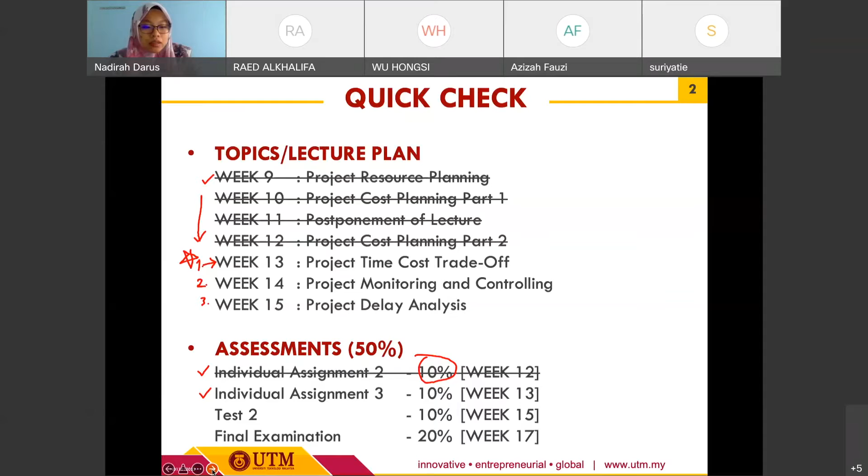All right, so that's all for the quick check. Then we need to proceed to today's topic of project crashing, or project time cost trade-off.

Before that, I think we just do a short recall for our project cost planning topic, which is on week 10 and also week 12, before we proceed to today's subtopic. All right, just a quick recall. Last week we have covered on project cost planning.

The main items or the main topic for this project cost planning is that you need to understand, if we refer back to project cost planning part 1 and part 2, the type of cost, the breakdown of the cost, so that it is easier for you to do the calculation and to analyze the question. So if we refer back to project cost planning part 2, you need to be able to analyze the question requirements, especially in terms of the value or cost of work or cost of the project.

This one I have mentioned quite several times, so I think all of you already remember this. And then the other thing quite important, based on the question requirement, you need to know which amount needs to be deducted and which amount needs to be added to the calculation. This one is more focused on the calculation part.

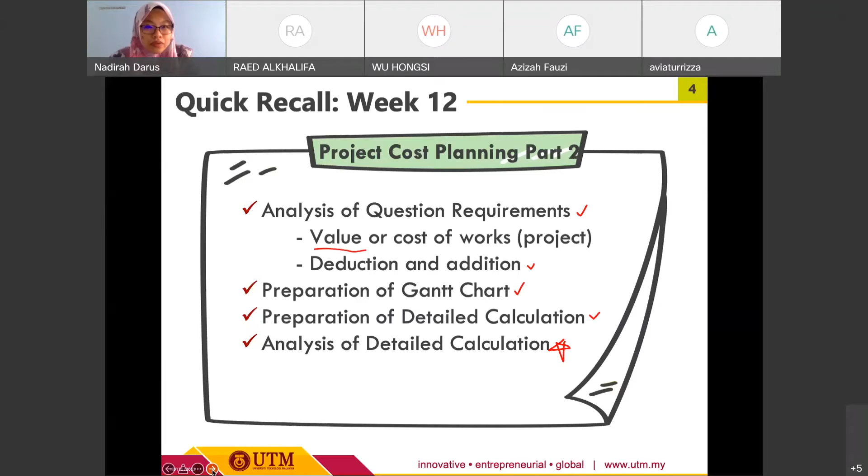So that once you have analyzed the question, you need to proceed with the required steps, starting from the preparation of the Gantt chart, and then you will be able to prepare the detailed calculation and answer the question by analyzing the calculation. So I think all of you can do the calculation and are able to complete the previous assignment. So that's all for the recall, or just a quick review, for our previous topic.

So now I will continue to this topic, which is on project crashing, or project time cost trade-off.

Okay, let's start with the introduction or overview for project crashing. I just refer to it as project crashing since it is easier for us to call it that instead of project time cost trade-off, because that name is quite longer, right?

For the introduction, this is just the definition of project crashing or project time cost trade-off. There are several terms we can use to refer to project crashing: time cost trade-off, project compression, since crashing and compression are quite similar in how we crash and compress activities. I will explain later what this topic is all about. Other terms include project expediting and shortening.

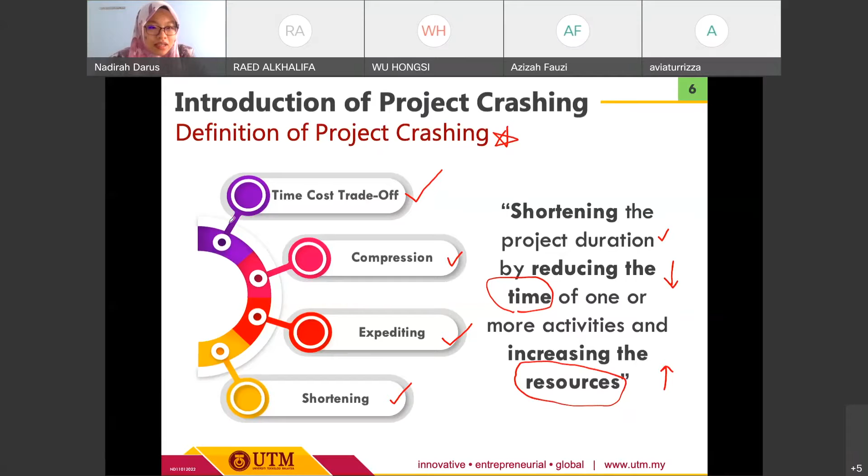This is another subtopic. This one relates to the previous one, project cost planning. However, I would like to highlight again the total cost, since this relates to this topic too, so just a quick recall or revision.

CV, or contract value, or project value, is equal to total cost plus profit. I think by now all of you are aware of this simple formula, so hopefully you can remember it and apply it in your calculations. Again, the breakdown for the total cost is a combination of almost 90% direct cost plus 10% indirect cost. These two components are the main components which contribute to the total cost.

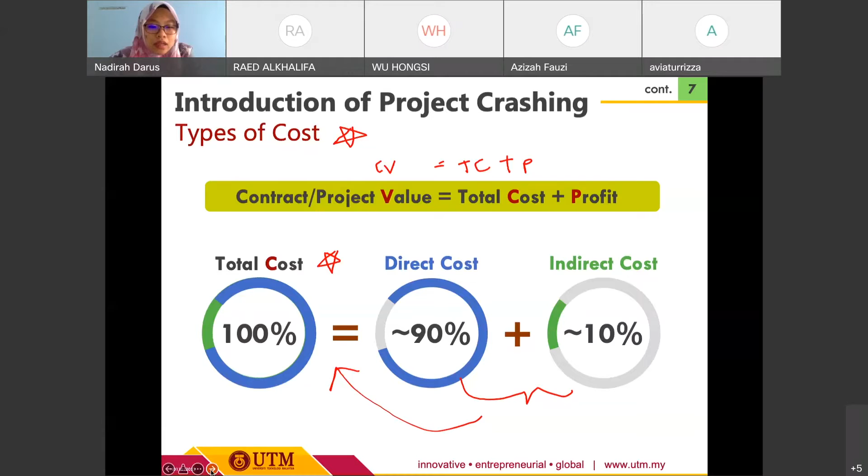So this is just a simple and straightforward relation formula. The next subcomponent for today's class is the relationship of time and cost. I mentioned earlier that there is a relationship between time and cost, which is why the topic is called project time cost trade-off. The title itself already mentions the time cost trade-off. These two terms, time and cost, are interrelated for the purpose of this topic, and we are going to look at this in detail.

This is a conceptual graph to represent the relationship of time and cost in relation to project crashing. This is another view of the time and cost relationship, because previously we also looked at several types of plotting for direct and indirect cost. However, this one is quite different, another scope for the time and cost relationship. What we have here is, as usual, the main components of this relationship: cost and time.

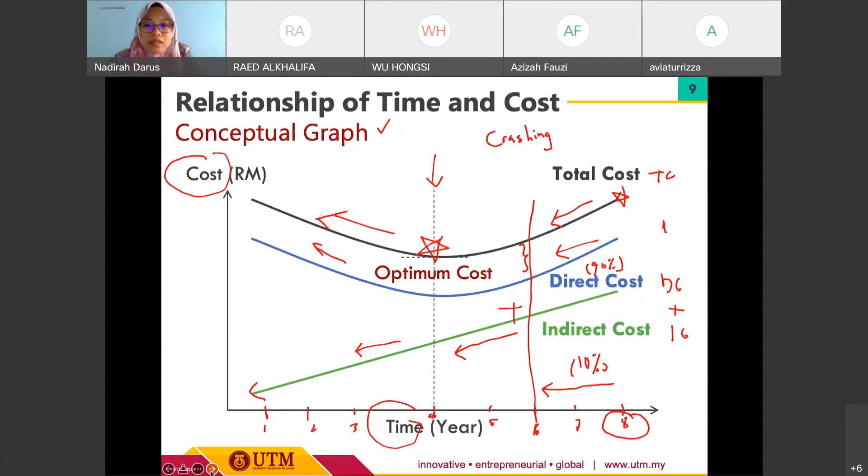This is the description for the previous conceptual graph. Here we have two situations. The first one is quite a normal condition, whether we want to increase or decrease.

For example, this one, we try to increase the project duration or time. So in normal condition, as we know, once we increase the time, for sure direct cost, indirect cost, and automatically the total cost will be increased. That's what we call normal condition for the time and cost relation.

In case of project crashing, because we try to shorten, we try to compress the time, the duration to complete the project, as I already mentioned just now, in case we decrease the time, we compress the time, there is still a tendency that direct cost will be increased.

Normally, if we try to decrease to an extreme level, if we try to compress the activities, try to shorten the duration to an extreme level, that requires the contractor to fully utilize the resources. For example, they need extra plant and machinery, they need more manpower to complete or construct the work. That's why they for sure have this higher direct cost.

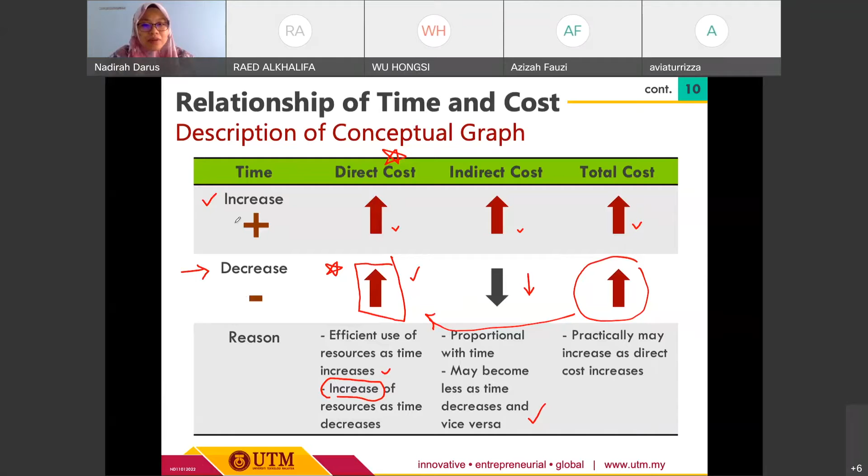So up until now, is everything clear regarding the relationship of time and cost? Is everything okay? All right, that's all for the relationship of time and cost, so we will continue to the next one.

The next one is related to reasons, or purpose, of project crashing. Meaning why we need to do the project crashing, the project shortening or compression. There are several reasons we need to know in order to relate to this topic.

The first one falls under the category of bonus or advantages, because in certain situations the client requests the project to be completed ahead of the actual scheduled time. This is based on client request, for example, we have a residential project.

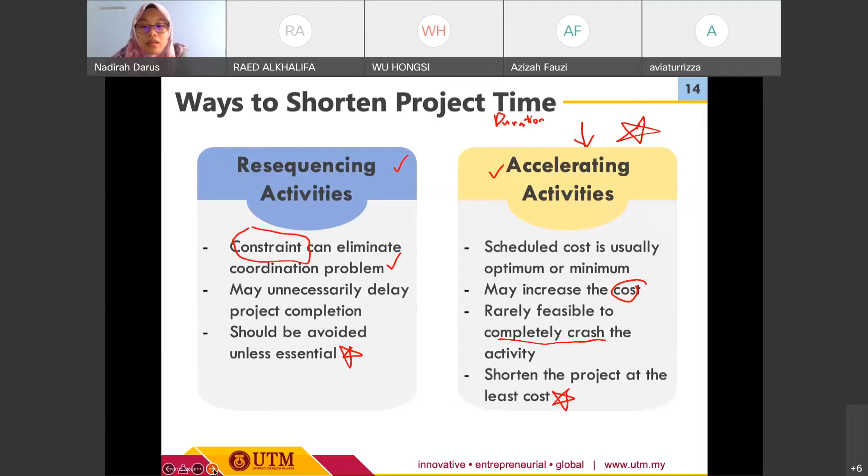Because we try to balance these factors, time and cost, at the end the contractor will not bear damages or any loss for the project.

So how do we want to crash the activities? There are several options for conducting the crashing. The first one is related to manpower or labor, which is the first M of the 5M resources I shared earlier. In order for the contractor or planner to crash the activities, they require extra manpower for each activity, and most of the time they need multiple working shifts. They may need extra working shifts, hours, or days related to labor, the manpower.

The other option is related to plant and machinery. In order for us to decide on project crashing, we need larger plant and machinery with higher output or productivity. So once we compress the time, for example with tower cranes or mobile cranes, instead of using one or two for the project, we may need double the quantity, or more, for higher output for each related activity. That's why there will be additional equipment or plant and machinery needed for certain tasks or activities.

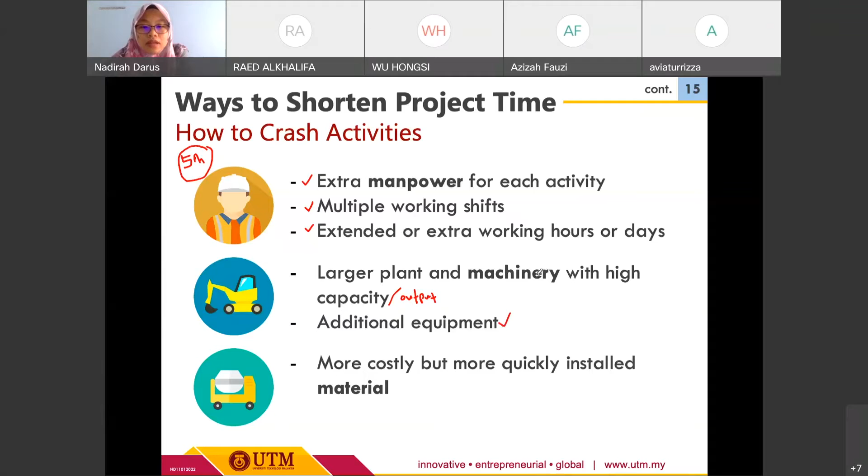In terms of material and other resources for the project, sometimes in order to fasten the project and deliver it in shorter duration, we need more costly material but quicker to install. For example, instead of conventional construction, we purchase precast components, which is IBS component, for the structure to be built. So that's the example of how we want to crash the activities and what is required in terms of resources related to manpower, machinery, and material.

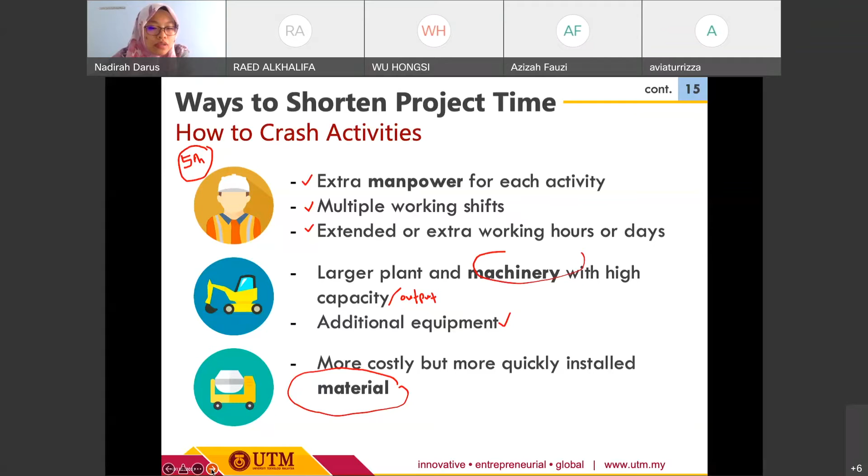Okay, so the next thing we'll cover, I think, is an example of how we want to shorten the project time. Here I would like to relate the productivity of labor to the cost and also to the time of each activity.

As for now, here we have a simple example with the estimated daily production for each crew size. The task or activity is installation of metal siding. These are the estimated daily production in meter square area, and the size of the crew or gang. Here we have several options, A up until D. Each group or crew size consists of several types of labor, and here we provide the cost for each machine, equipment, and labor wages.

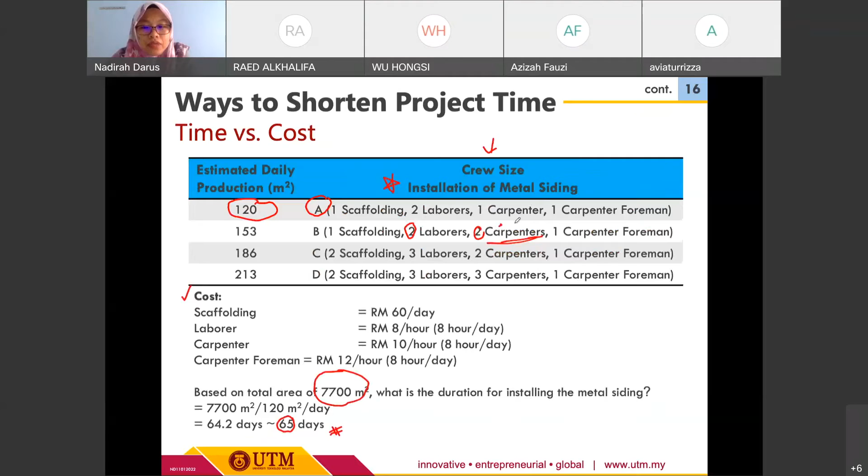So meaning that even though we increase the number of workers here, there's still a chance for us to have this lower total cost. So we need to know how to analyze, try to calculate, try to select the best option. In this situation, this is the best option, which is crew size B, because we have shorter duration to complete the work with the least cost here.

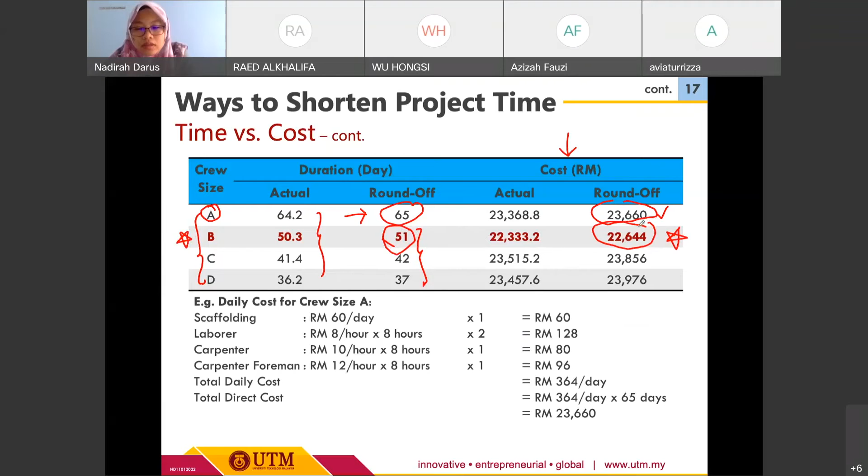If we try to translate this in graph plotting, we can see that the second option is B, so A, B, C, and D. So just now I have shared with all of you the conceptual graph for time and cost. We can see that there is an inverted curve here, mostly likely. So this is the first option with 65 days here, with total cost of 23,000 plus.

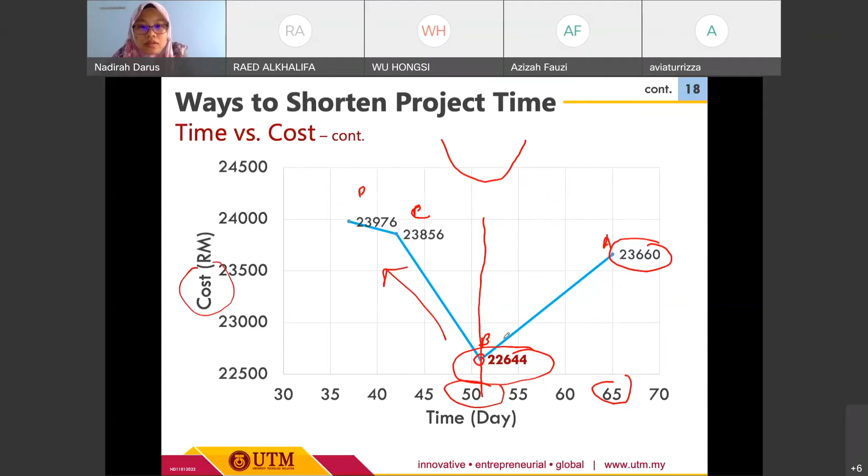If we try to analyze the other crew sizes, we are able to reach this one, meaning that we have the optimum line here with the least time and cost to construct the work, installing the metal siding. And if we further evaluate, the cost is increasing. So based on all these options, B is the best option because it has the least cost and time to construct the work.

So can all of you understand this, or am I going to pass to explain this to all of you? Okay, Doctor. All right, hopefully all of you already got clear with this one. If you have anything to ask, you may do so. Okay, the next one.

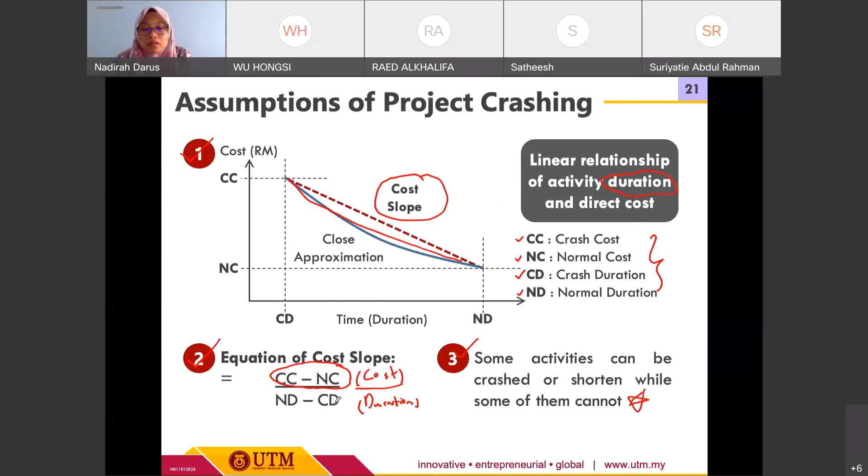For the cost, here we have 10,000 and 6,000. So the cost slope calculation, just apply the formula: crash cost minus the normal cost, divided by the normal duration minus the crash duration. So 10,000 subtracted by 6,000, divided by 10 days minus 4 days. At the end, we have this cost slope.

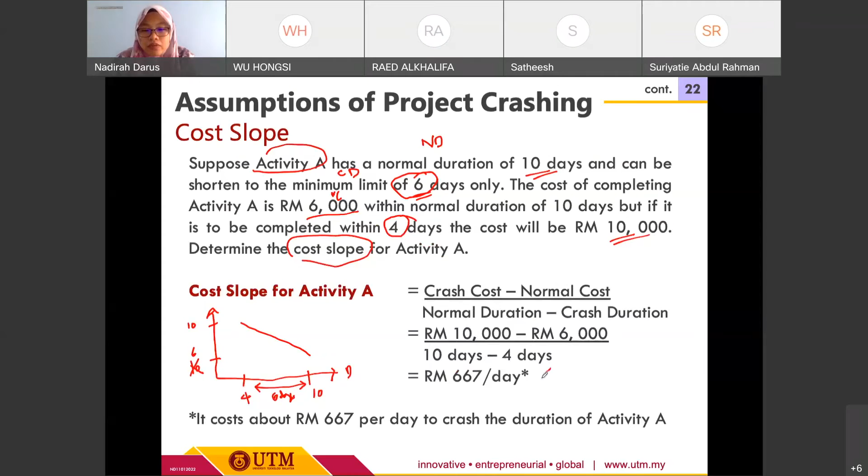So what does this cost slope refer to? 667 Ringgit Malaysia per day is the daily cost that the contractor needs to spend in order to crash the duration of the activity. So this is the cost they need to allocate in order to shorten the duration of the activity. That's the basis for this cost slope.

Okay, so that's the example for cost slope before we proceed to the next calculation on how to crash the duration for the project. Okay, so far so good? So we proceed. Okay, thank you for your response, and I hope all of you are still here for this class.

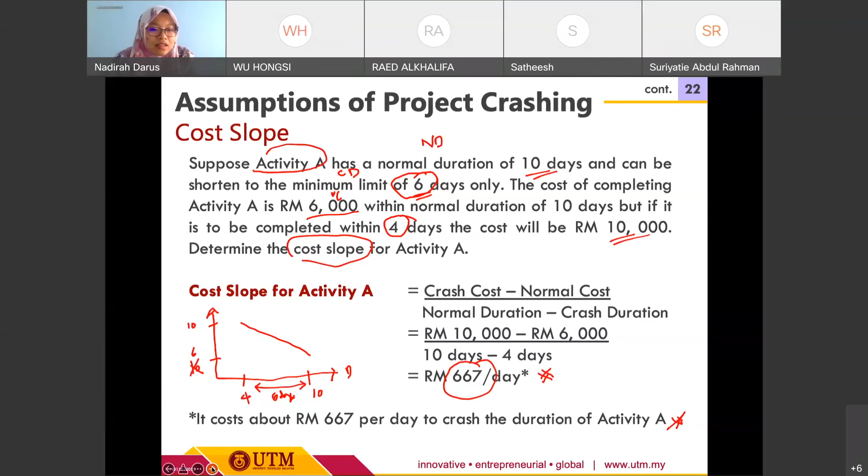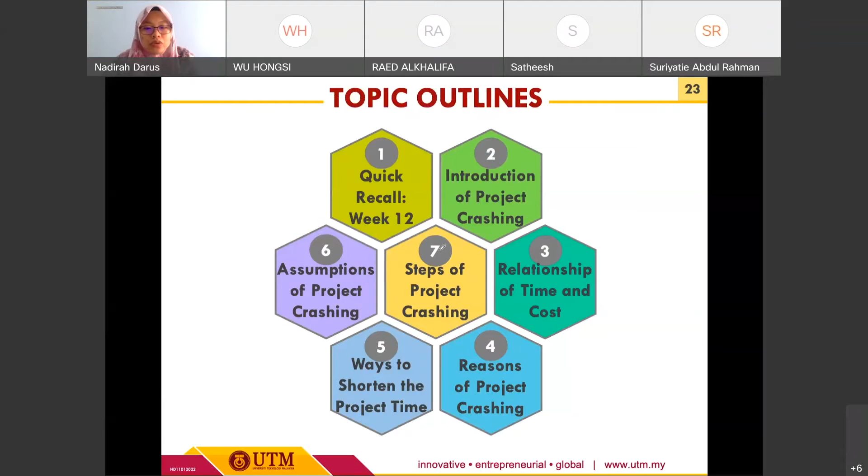Okay, this is the last component for today's topic, which is the steps of project crashing, and at the end I will show you an example of project crashing. In overall there are several steps involved that we need to consider to prepare the shortening or crashing for the project. The first item is related to the network diagram, because we need to determine the normal duration, the total duration for the project to be completed, and then we can identify the critical path.

So there are two items required for us, based on the network diagram, and then we can proceed with the calculation of cost slope. This is the first one - the network diagram. The second one, cost slope. So based on the given information, we can calculate the cost slope using the equation: CC minus NC, divided by ND (normal duration) minus crash duration. So later on you may apply this equation for cost slope calculation.

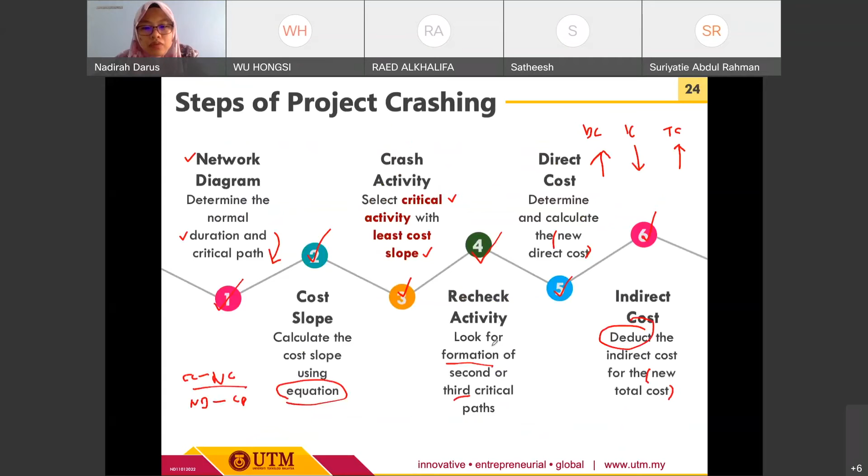This one, we check activity, look for the formation of second or third critical path. So this one will be the second critical path right now.

Okay, then step number 5, we need to calculate the new total cost, new direct cost. So just now we have crashed activity A, task A, for 1 day. So what's the effect on the cost? Task A, it's already mentioned that the cost slope per day is 100, so we need to add another additional 100 to the total cost. So this one will be 5,100. So this is the effect of this project crashing task A for 1 day.

And then we are trying to look for more options. We try to evaluate, okay, if we do further crashing, what's the effect on the cost? So then we proceed with the project after crashing task A and task B, that 2 days. So now A and B are critical activities, so we focus on this. We leave behind task C, we're just focusing on A and B first.

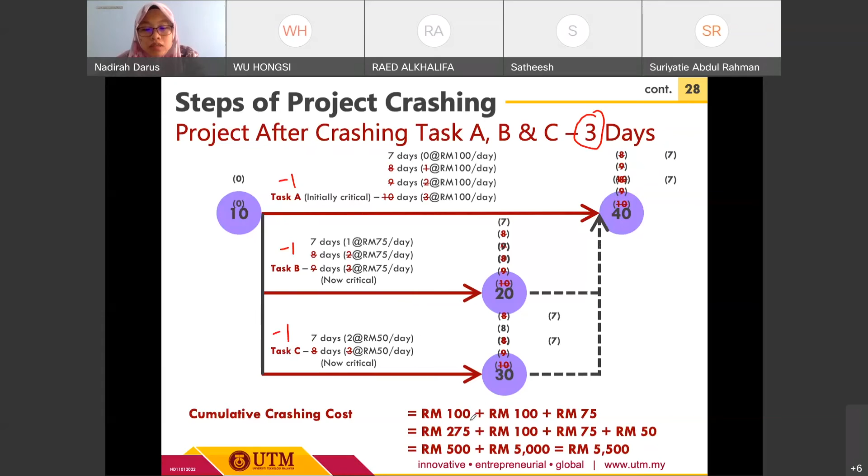Similarly, if we try to further crash the activities, for example if we go for 3 days, we consider all of these activities. So now 1 day for each activity: task A minus 1 day, task B, and similarly task C. So again, all of these are now critical activities, and we just repeat the same calculation, considering how many days you have crashed and what are the costs for the cost slope.

Here we can see that there is no more balance for crash duration available for task A, because task A is really crashed. This means it has reached the limit. So this is the most possible duration, which is 7 days. As compared to task B, we have 1 more day left, and task C we have two days left.

So just recalculate this one, from the previous 275 plus another additional amount charged for the crashing activities: 100 for activity A, 75 for activity B, and 50 for activity C. So at the end, you come out with this one.

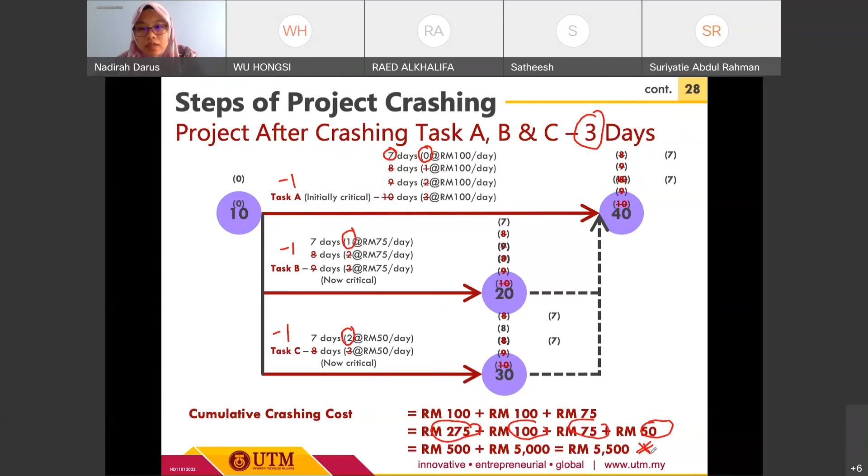So all of these, we call it depending on the decision by the contractor or the planner on selecting which option they would like to proceed with. If they have more resources, they are capable of allocating more budget for a 7-day working duration, then they can use this option. So all of this depends on their decision, their ability in terms of resources, and most importantly, their cost.

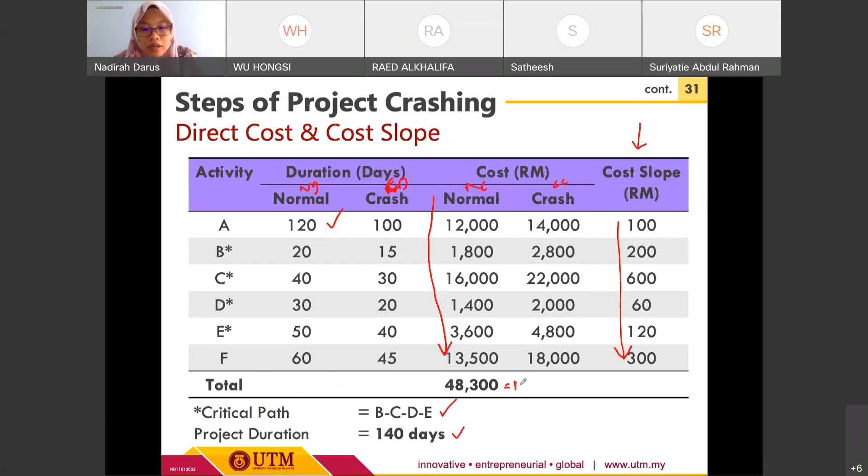Direct cost, based on the previous calculation, you need to consider the normal cost for the direct cost - this is for direct cost only, not including the indirect cost yet. So you have 48,300 for DC, direct cost, plus the previously given indirect cost, which you can assume is about 50 ringgit per day.

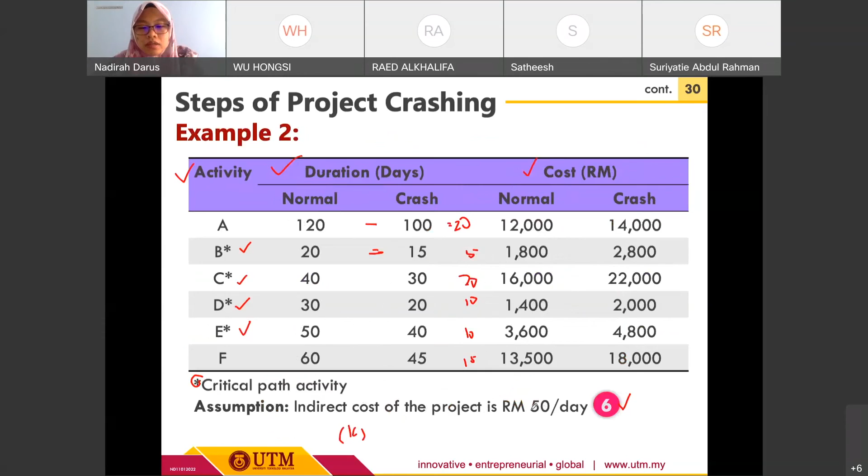Then you need to multiply with the total duration. So 50 ringgit for the total project duration in normal condition, before we do any crashing. This is the total cost. Then we proceed with the next one.

Now, how do we select this first? Back again, if we refer back to the criteria to proceed with project crashing, we need to focus on the first critical path.

The second one is any activity with the least cost slope. So if we compare here the critical path least cost slope: activity B we have 200, this one 600, this one 60, and the other one is 120. That's why we go for activity D first as our first activity for this question.

For this case, we try to do the complete crash for this allowable duration. We try to deduct 10 days here, and the new duration will be 20. We need to calculate again and update the latest duration for each of the activities. At the end, the total duration will be 130 because there are 10 days deduction in order for us to crash activity D for 10 days.

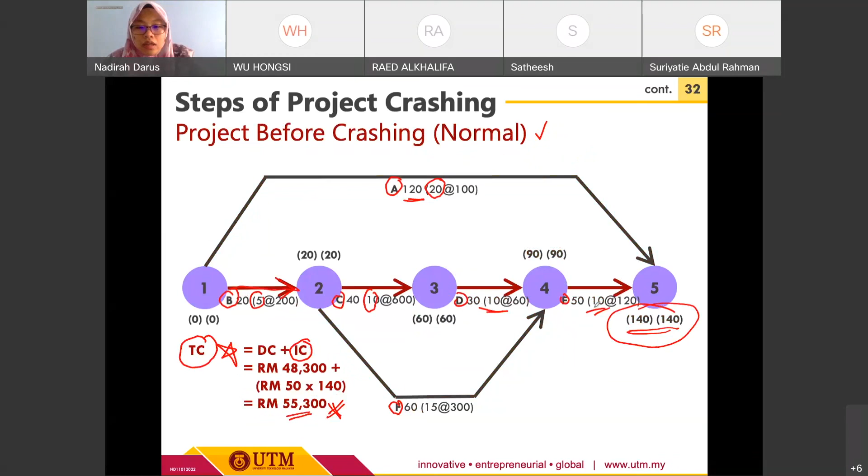So now, if we proceed with or decide to crash D, there's now D, and now we have E. We try to crash activity E. Why we choose E? Because if we compare B, C, F and E, E has the lowest cost slope here, 120. Because D just now cannot be further crashed because it's already 0 here. So we look for the option for the other tasks or activities, and we go for E.

E also we try to crash for another 10 days. This is completely utilized here because there are no more values, no more days that can be crashed. Now the total duration becomes 120. So A also now becomes a critical activity.

Again, once we have crashed the duration and selected the related activities that we want to crash, we need to calculate this total cost. So 120 for crashing activity E for 10 days, we need to do deduction. We carry forward this amount, 55,400, to the next one, plus with the current crashing cost, and again we need to remember to deduct here for the indirect cost, and we are able to obtain this new total cost.

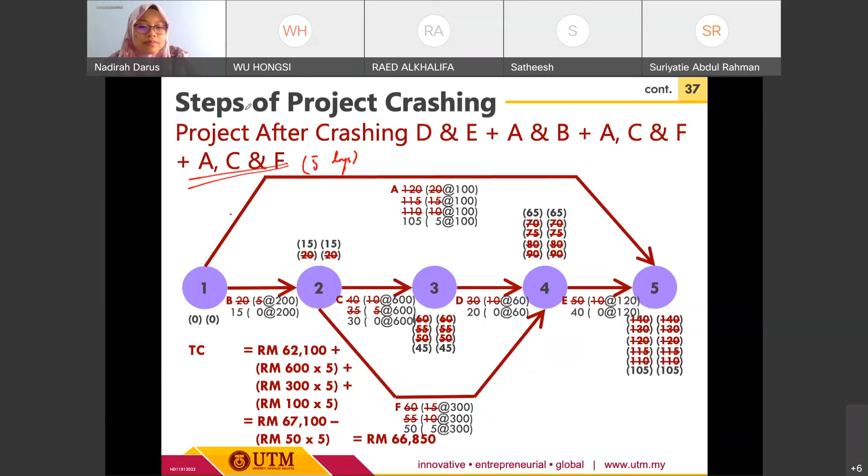It looks like this one is never-ending calculation. However, it's depending on our own creativity and own ability, depending on the available resources and also cost capability of each contractor. All right, so I think that's all.

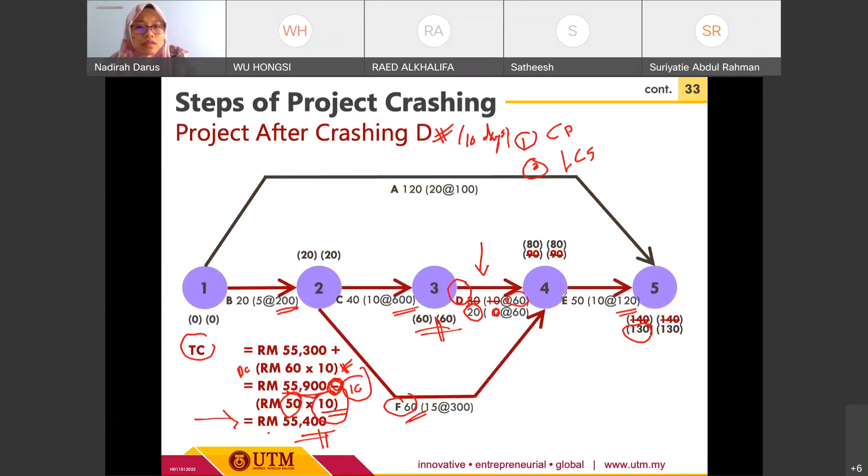55,300. Okay, if we do the first condition or first situation of crashing, which is we select activity D, if I'm not mistaken, that's one D. So this is the effect on the cost. There is only 100 additional amount. It is increasing, however it is a minor increment.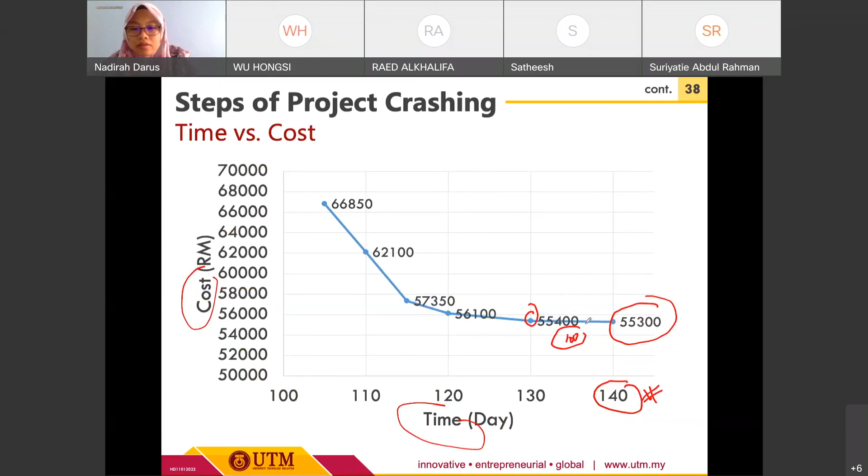55,400, additional 100 here. And then if we further crash, we can see that the cost is increasing. So that's why I mentioned just now, it's depending on the contractor themselves, which option they want to select. Either they want to stop here, or if they are capable, they can go for this one, so they can construct or deliver the work within this duration, 105 days.

So I think that's all for today for our topic, project crashing, or supposed to be the official name, project time cost trade-off. So it's easier for us to just mention project crashing because it's just similar terms, referring to the same item.